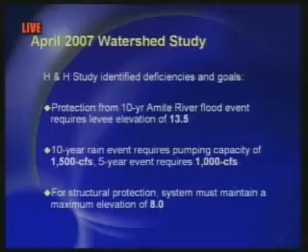And based on some basic investigation of the structures in the basin, the system must maintain a maximum elevation of 8.0 to protect the structures. Basically, the required flood protection system needs to perform two functions. One is to protect from backwater, specifically the Amite River backwater from entering into Henderson Bayou. And secondly, rainfall removal. If the basin is protected with a flood system and a floodgate and a levee, any rainfall that happens during a high water event would have to be removed. And so these are the two parts of the system that we investigated.

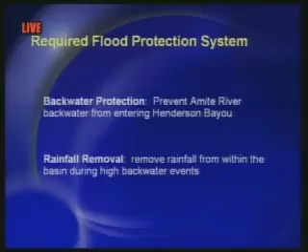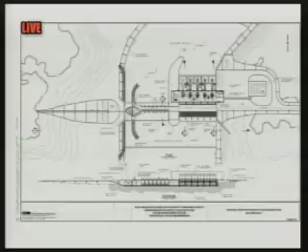The pump station configuration that we determined would make most sense for this application is summarized here. First of all, based on the needed performance range, vertical type pumps would be most appropriate for the type of flows that we're looking at. And we've talked to Bill, and there may be some preferential operational type issues that we'd like to work out in specifics. But I think at this stage, at the conceptual level, a vertical pump system seems to be most appropriate. We would also propose a four pump system, so that you would have two 500 cubic feet per second capacity pumps and two 250 cubic feet per second capacity pumps, so that you would achieve the 5-year performance goal of 1,000 CFS, even if any one pump were out at any given time.

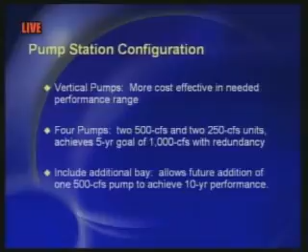We would also propose that the board include an additional bay, just a blank empty bay, so that a future 500 CFS pump could be installed, and by doing so you would basically double the frequency of protection to a 10-year rainfall event. The floodgates are there for a specific purpose. Henderson Bayou is a navigable waterway, and maintaining traffic once the pump station is actually constructed is important. Of course, we are anticipating smaller recreational traffic, so that would hopefully make a far less involved gate than you would see at other facilities. We would propose a 30-foot opening at this point to allow that anticipated traffic.

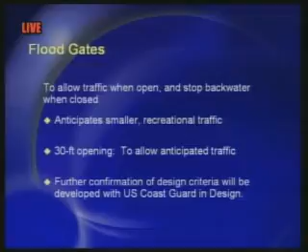Obviously, working with the board and with residents and folks who use the bayou, if we can come up with something smaller, that would be advantageous. But the final confirmation of the gate design criteria has to be with the involvement of the U.S. Coast Guard, because it is a navigable waterway. Finally, the levee system. It is intended to basically take advantage of the natural contour in the Henderson Bayou Basin to meet the 10-year backwater elevation of the Amite River of 13.5.

We would tie into the highest natural contour in the vicinity, which happens to be one of the highest ridges in the Henderson Basin. Based on the topography of the basin, it's clear that we can't really achieve anything better than that 13.5 elevation of protection without encircling the entire basin with a levee. The topography is fairly flat, and it's fairly lower the further upstream you go in Henderson Bayou.

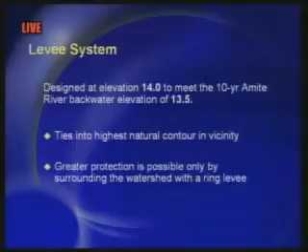Beyond just the technical considerations of engineering, equipment selection, site development, there are quite a few planning considerations that make this a little bit more complicated. Obviously, first and foremost is wetland permitting and mitigation. Particularly the west side of the bayou is clearly wetlands, and that would have to be mitigated, and that cost would have to be taken into consideration. And it is, at our planning level cost estimate, taken into consideration kind of conservatively.

We also have to adhere to Army Corps of Engineers requirements. Though they're not funding the project, flood control projects of this nature and this scale are typically handled by the Corps. Getting their buy-in and involvement early, which has already been done actually, is going to help the process move forward more smoothly. Land acquisition is also another thing that the board should keep in mind, and obviously the preliminary engineering step is going to prepare the board to move forward as necessary to acquire land.

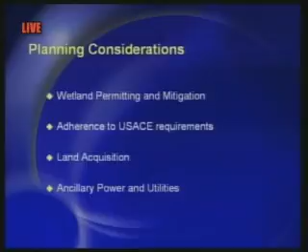And ancillary power and utilities: though these pumps are certainly going to be run off of the electrical grid on their own power, there will be a need for ancillary power and utilities, water, sewer, et cetera, to accommodate maintenance and operation staff. Finally, the schedule, that's probably the more critical component of the project. The construction completion goal is December 2010, and that anticipates an aggressive construction duration of 730 days. To meet that schedule is going to require a good bit of effort on everybody's part, not just the engineer, but the board and other parties, regulatory agencies, et cetera.

To meet that schedule, we've suggested some pretty aggressive dates, beginning design as soon as possible, then submitting a preliminary design document in June of next year, and then turning in final design in December of next year as well. That gives the board almost exactly 2 years to get the job advertised, bid, and built. Any questions regarding any part of the project? We'd be happy to go over it with you specifically.

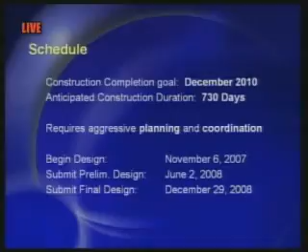Mr. Barger. Yeah, thank you, Mr. Chairman. You said the power source was going to be on its own grid, electricity. Do you have a secondary diesel power backup or anything? That's exactly what I meant to suggest, that the pumps would be powered on their own by their own diesel power, not off of the electrical grid. Oh, okay. You said it was going to be on its own grid. Yeah, I misspoke. It's going to be powered on its own. About to say that ain't going to work in a hurricane. No.

More questions? Mr. Chairman, the next part is to review the fee proposal in phases, and that should be in your handout spreadsheet. And the total price, like I mentioned in the proposed motion, is a general task order not to exceed $1,581,000, and that's for preliminary design fee and associated outsourcing of other consultants to gain this preliminary engineering. One of the key aspects of this is a laboratory intake canal modeling, which they're going to go to a national firm to do. It's a good bit of money, but that's what CDM and URS and the rest of the design team are going to use to really look at the most efficient way of going forward with this project.

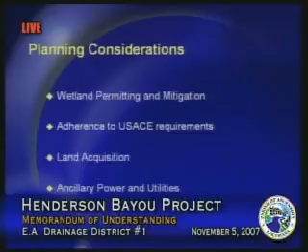It's kind of difficult. Bill, can you explain? I'll dive in because I'm more familiar with this area. I might be able to put the map up on the screen to help you. This is actually at the convergence of Henderson Bayou into Lake Velor. It's a fairly narrow channel location between the two high banks, so now we can connect the two high banks.

It's also a pretty good low area in front of it that we can utilize for a reservoir to collect at least the headwaters coming down. It's a non-populated area, and we have talked to the landowners already, and they're favorable in selling the property to us. So everything is coming together as the most feasible and, from an engineering standpoint, best place to put it.

And the ideal thing with it too, if you go any further up, then you're going to have to make a much bigger levee because you have Bayou Miette coming off of it, the lateral. If you go further up, you're going to have to go past that inlet of Bayou Miette to Henderson Bayou, so you'd actually have to put another floodgate and levee around. So this is probably the only place you can have it from an engineering and feasibility standpoint.

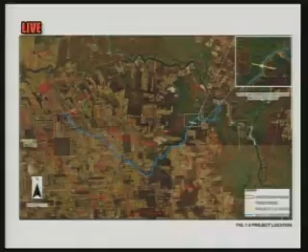It just so happens that the one spot where there is a ridge where you can build a levee also happens to be a fairly straight run of the bayou. So it's very convenient in that sense also. Just as Bill said, there is almost no other place to put it from a practical sense, but it's also pretty convenient from a configurational standpoint. Okay. And also, Mr. Valentine,

what we propose to do with this project, which is not included but has been talked about a lot, is necessary to include at a later date, as part of our general funds or as a special project with money that we find. We need to dredge Lake Velor and open up the channel from Lake Velor to the Amite River to get this water out. That would do two things. It would expedite the flow from the pumping station when it's in use.

The other thing is it would benefit the people living along Lake Velor for getting traffic in and out. They can utilize their property a lot better. It'd be a lot more functional for fishing and boat traffic, but at the same time will give us the benefit of getting that water out when we have our pumps on. Okay. Yeah, and maybe Bill. We had a few people ask about the impact that pumping the water to the Amite River would raise it some, but I know the Comite project is taking place that's supposed to drop the Amite River a certain amount, so I don't see a big impact.